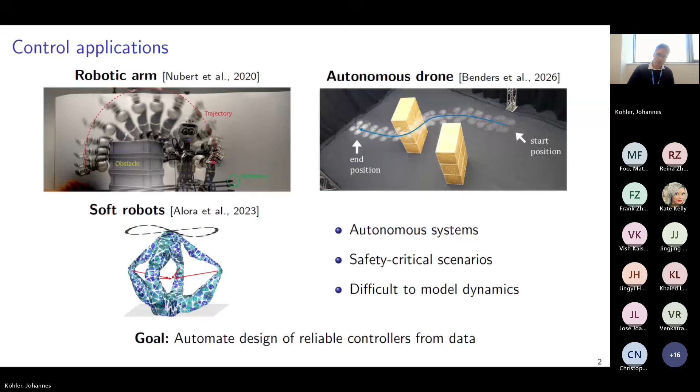Now, what makes these problems challenging? One thing I already mentioned is we want safety critical constraints. That's important. There's also a lot of things that are uncertain about a system's behavior. There's external noise we have to think about. And there's also the fact that typically we don't know how big these uncertainties are or what our actual system model is.

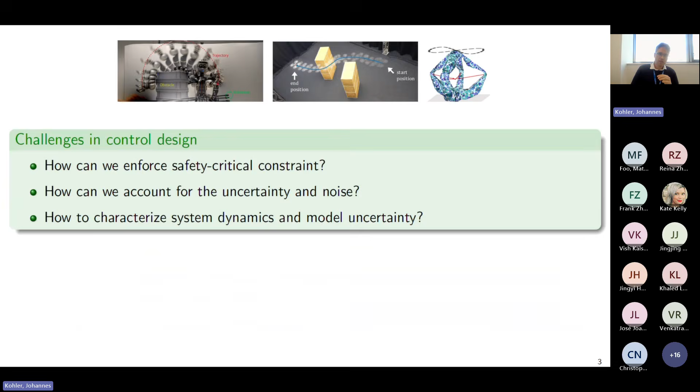The answer to these questions that I'll present in this talk is what I call data to predictive control, short D2PC. We'll have later some illustration that explains this better. But in essence, we want to use the experimental data we have to characterize both a model that explains the data and an uncertainty description. Then we want to use this description to design robust controllers and predictive controllers. And by combining these elements, we'll get a data-driven control design that will give us desirable performance and safety guarantees.

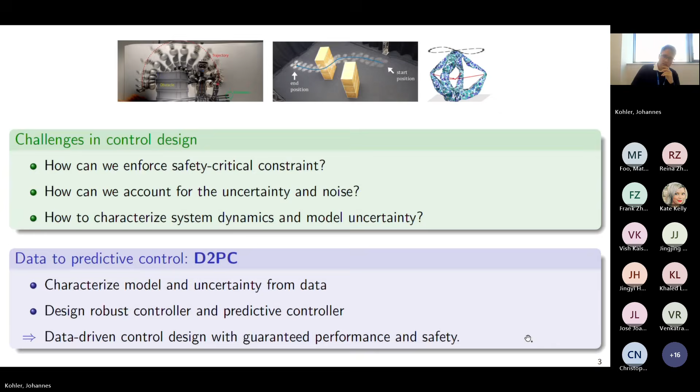Now, for the overall work, we can think about the following pipeline, and all of this presentation will be based on this pipeline. We start with a real system for which we do an experiment and we get input-output data out of it. Usually it's noisy. Then we have structural constraints. By this I mean prior knowledge we have about the physical system. Whatever we have, we want to be able to use it. That's also a very important property. Then we combine our structural knowledge with the data in an estimation step to get as much information from data as we can about our physical system.

In a second step, we want to do uncertainty quantification. So we want to get an understanding of how accurate the model is that we retrieve from data. Once we have our model and a description of the uncertainty, we want to do a robust control design where we want to be sure that we account for these model uncertainties. And in the last step, we want to also use predictive control with online optimization during runtime, which will additionally enforce safety critical constraints for the uncertain system.

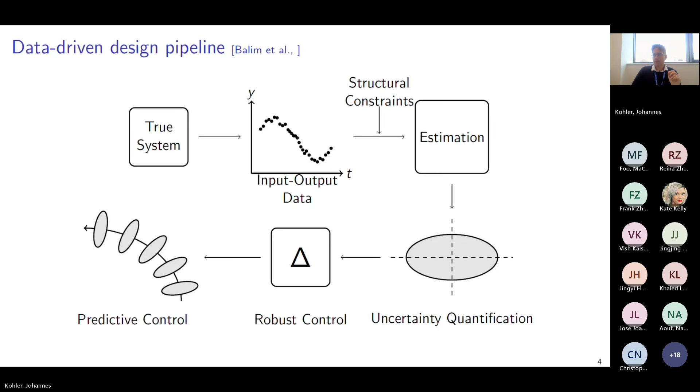So if we think about such a control design, it actually touches different research fields in control theory. The first one is the field of system identification. Classically in system identification, we think about how we can retrieve models from data. Sometimes we also think about uncertainty quantification there, so how accurate models are. But typically system identification does not deal with the separate control synthesis based on the model.

Another related field is the field of robust control. In robust control, we're typically given uncertain models, often with a block structure like this, and we're able to synthesize controllers that give us stability and performance guarantees for this uncertain system. But robust control typically cannot account for the constraints we have in physical systems, such as actuator limitations or obstacle avoidance.

Now, the third related research field is model predictive control. In model predictive control, we try to enforce constraint satisfaction, so actuator limitations and obstacle avoidance. But typically, most of model predictive control theory requires an accurate model for predictions and also assumes state measurements. So if we want to have such a data-driven design, we need tools from all three disciplines, and none of those three research fields actually answers all of the questions we need.

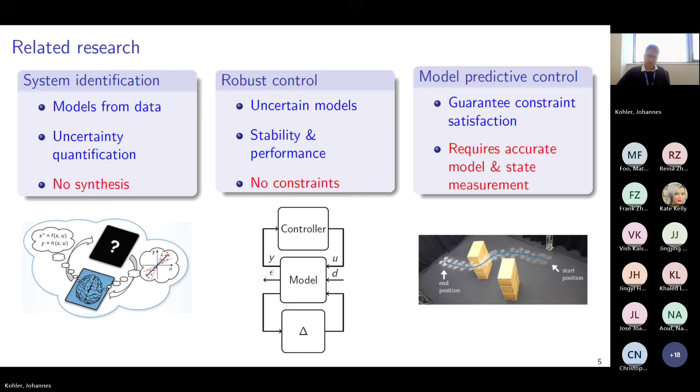So really what data to predictive control aims to do is to get the best out of those three fields and put them together. The key challenge here is that these different research fields in control have inconsistent modeling assumptions. What do I mean by that? In system identification, classically, we assume stochastic, often Gaussian, process and measurement noise, which is IID distributed. In robust control, we typically deal with uncertainties that are dynamic functions which live in some deterministic set that we know.

In model predictive control, we typically assume that we measure the state, and often we don't have any model mismatch, or a very simple description of it, for example, one that simply lives in a compact set like a polytope. So we have three very different descriptions of uncertainty, and it's hard to just combine those fields. One of the key technical contributions we've made to combine them is that we derived robust control and predictive control methods tailored to the uncertainty resulting from the system identification step.

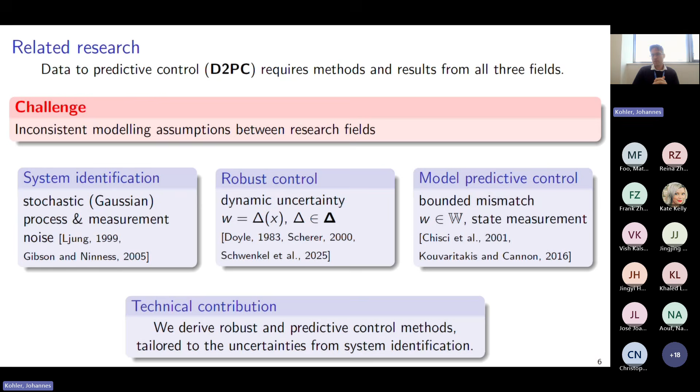Now, one thing I want to note: throughout this talk, I will mainly look at linear dynamical systems. This will make a lot of the exposition easier. Towards the end, I'll briefly touch upon what results we currently have for nonlinear systems and what is still challenging.

So we'll look at linear stochastic systems, where X is the state, U is the control input, W is the process noise, and X plus is the next state, in discrete time. Y is the measurements we receive, which are partial measurements of the state plus measurement noise. We assume the process and measurement noise are Gaussian distributed IID with covariance matrices Q and R. What's important is that the system matrices A and B and the noise covariance matrices Q and R are not known a priori. Instead, we have an input-output trajectory from a finite-length open-loop experiment.

So first we have to go from this data to estimates of these unknown quantities. Then, to get safety and reliability guarantees, we need to understand how big the epistemic and aleatoric uncertainty is. As a reminder, aleatoric uncertainty is the stochastic uncertainty in nature, so process noise and measurement noise. Epistemic uncertainty is the uncertainty due to limited knowledge, because we don't know the exact entries of the A and B matrices, for example. So we need to understand how big those two uncertainties are, and then we need robust and stochastic prediction methods that can account for this uncertainty.

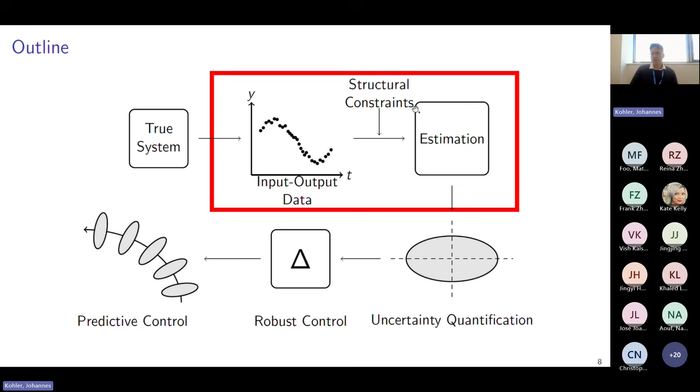So the outline of this whole talk will be based on this pipeline. And now that we've described the real system behavior, the first step will be understanding the estimation step, where we're given this noisy data, and we'll talk about structural knowledge that we can optionally incorporate if we have it, and the type of estimation procedure we do.

Now, the structural constraint we'll assume here is that the A and B matrices, which we don't know, are linearly parameterized by an unknown vector, which is finite dimensional. So what does it mean? If we don't know anything about a system, modulo maybe an upper bound on the order, then we can take a normal form, like an observer normal form, where we know certain entries will be 0 or 1, and all the other entries that we don't know will be given by this finite dimensional parameter.

On the other hand, if we have a physical system, like a mass spring damper system, and we just don't know the damping constant, then only this one entry, which we don't know, will be given by this uncertain parameter. And by just saying these matrices are affinely parameterized, we can model flexible combinations of these two. So whatever prior knowledge we have, we can incorporate.

In addition, for the covariance matrices, we assume they are also parameterized, not necessarily affinely, by some vector. This can, for example, be a diagonal or Cholesky decomposition. What's important: everything we don't know about a system can be captured by this finite dimensional parameter vector theta.

Now, what we do for estimation, in some sense, is very simple and classical. We do maximum likelihood estimation. That is, given the data we've observed, we look at the likelihood of a certain parameter, and we search for the parameter that's most likely given the data.

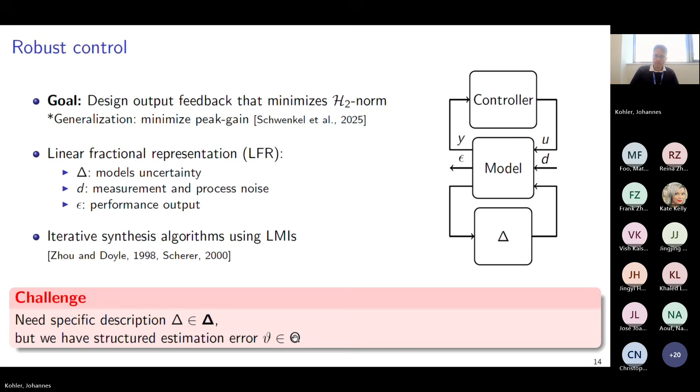The challenge we have is these existing methods require a very specific description of the uncertainty in this linear fractional representation and a very specific structure of this uncertainty block delta. Instead, what we have is an affinely parameterized model where this parameter is subject to a structured ellipsoidal constraint. Now, one of the key contributions here is we've shown an equivalent way to bridge these two descriptions.

Specifically, let's just focus on the A system matrix. We can write the uncertain A matrix, which depends on the parameters we don't know exactly, as our nominal estimate from data, plus a matrix delta, which is the error in the parameters with a Kronecker product and an identity. So this is a very structured matrix, multiplied by a matrix which captures how the parameters affinely enter the A matrix. So those matrices are all known, and it's only this delta matrix which is not known, which depends in a specific structure on our uncertain parameters.

Now, what we've shown is the fact that the parameters lie in a given ellipsoidal set is equivalent to the fact that this matrix with this Kronecker structure lies in the following uncertainty set. What's important about this description, if you've seen this before, we have here a matrix inequality on the matrix delta, and this is exactly the kind of description we need to apply existing robust control tools.

Here we also have so-called multipliers, and these multipliers capture the exact shape of our uncertainty, where we have here again this Kronecker type structure, and this matrix sigma captures the exact shape of the Hessian of the negative log likelihood, which we used for uncertainty quantification.

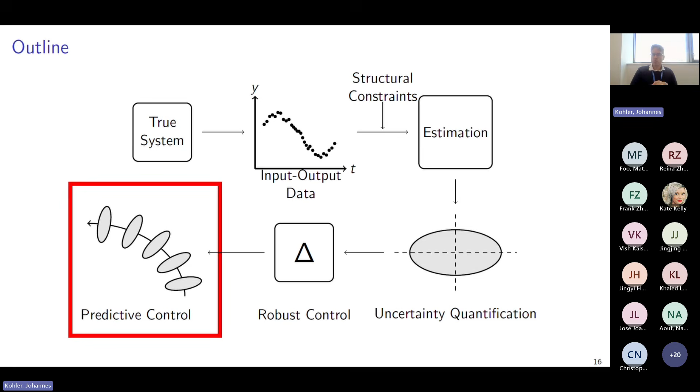Okay, so with this, we already achieved a lot. We now have a controller that stabilizes the system, guarantees some performance, but now we also want predictive control to deal with these higher level objectives, such as constraints.

So here specifically, we want to have a predictive controller that, in addition, satisfies probabilistic constraints of this form. So why do we look at probabilistic constraints? We have stochastic noise, so ensuring deterministic constraints would not be feasible. These are half-space constraints, so this is the simplest form of constraints we can have. We can similarly look at input constraints, but I'll keep it simple here. And we want that these constraints at any point in time are satisfied with a certain probability P, which the user chooses.

And we want to be sure that these probabilistic constraints hold for the closed loop system, even though we don't know the exact model parameters, and we have unbounded stochastic process and measurement noise, and we only have access to output measurements. The key challenge is that the prediction of the future state depends on this unknown deterministic parameter and on this unbounded stochastic noise.

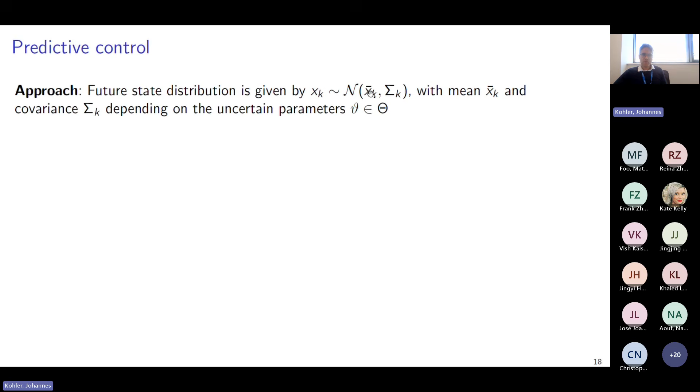How do we deal with this? If we would know the model exactly, then we would see that the future state also follows a Gaussian distribution where both the mean and the covariance depend on the uncertain model parameter. Now what we do is we treat both of them independently. Offline, independent of the actions of the controller, we can do a stochastic propagation where we compute a covariance matrix, which is a robust upper bound to the future covariance matrix, which we do not know. This can be done with a semi-definite program and is very similar to classical robust control tools.

What's important, I'm talking here always about Gaussian distributions, but most of the things I'll present in the following equally work for so-called sub-Gaussian distributions, which is a more general class of noise distributions, which doesn't just include Gaussian distributions, but also, for example, uniform distributions and any zero mean bounded distribution.

First, we need to choose a parameterization of these sets. Here we pick ellipsoidal sets that are centered around some nominal prediction and that are scaled by some scaling alpha. And now we just have to determine how much we have to scale these ellipsoidal sets to make sure all the uncertain trajectories lie within it. The way we determine the scaling is this simple scalar error propagation. This says the scaling at the next time step is first exponentially contracting.

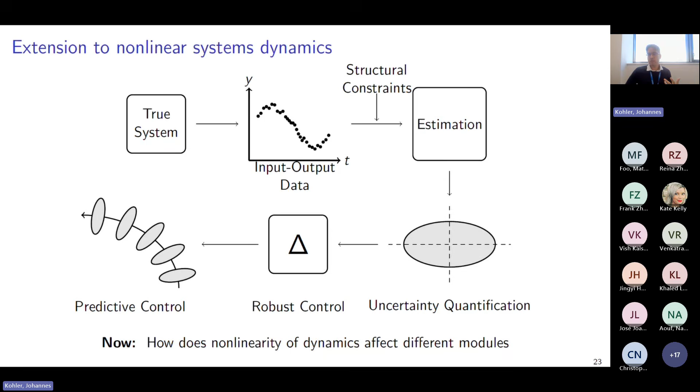Okay. This is the main part I wanted to cover. I want to just quickly give you a flavor of what changes if we go to nonlinear systems. And this means if we do the same pipeline, but for nonlinear systems, why does it get hard and what can we still do? And here the key challenge, in my opinion, is the data-driven estimation.

And the problem is what we used so far is that the maximum likelihood estimation or the state distribution has a closed form solution like a Gaussian distribution. And this breaks in a nonlinear setting. What we can do instead, we can use moving horizon estimation to provide a finite horizon recursive approximation of the maximum likelihood estimation for a given model.

Now, how can this help us? The way we can identify models from data instead is we can identify parameterized models using the so-called classical prediction error method, where we just train a predictor from data to be as good as possible. And the trick here is that we can use moving horizon estimation as a general state estimator for general nonlinear dynamics.

In addition, for uncertainty estimation, we can also use moving horizon estimation to estimate the magnitude of the process noise and measurement noise from data, which can then be used to determine the maximum noise we need to account for in the robust design.

For the robust and predictive control, the first thing I have to note is that model predictive control on its own is very well suitable for nonlinear systems. There are strong theoretical results, there are good numerical solvers for nonlinear systems. What is harder is the robust or stochastic design for nonlinear systems, because there's no exact formula for uncertainty propagation.

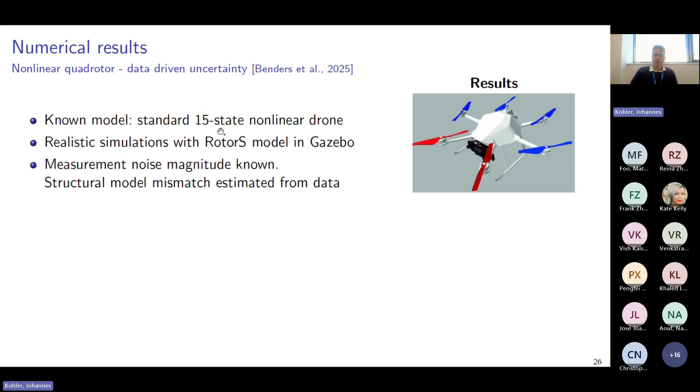And on the other hand, we take a known model as our model, a standard 15-state nonlinear drone model. We'll assume we have a rough idea of the magnitude of the noise, but there will be a structural mismatch between those two models. And we want to estimate it from data such that we can automatically design a robust controller.

Now what we do is run this moving horizon estimation offline over a large period of data, which requires about 1 hour for these experiments. Then we use this understanding of how big the noise is to design a robust controller, which takes about 5 minutes. We take another calibration flight, and with this we get a reasonable error quantification.

And what's important, this is similarly a modular open source pipeline. By executing it, doing 2 flights, we have a reliable controller after 2 hours. And of course, 2 hours is a lot longer than the few seconds we said before. But if you work with real robotics problems, having something that runs after 2 hours is really good, in my opinion.

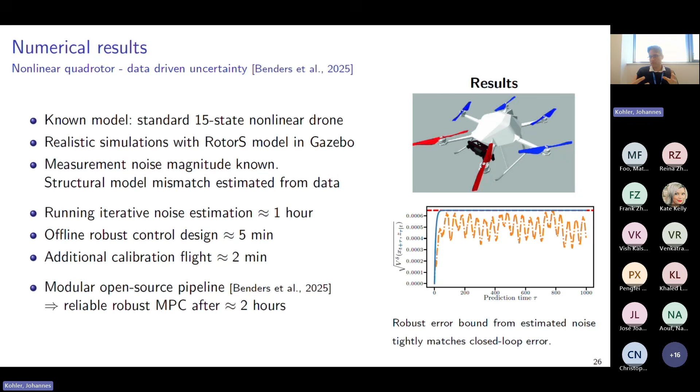Yeah, this already brings me to the conclusion of this talk. I've presented an automatic design pipeline where we go from data to estimation, uncertainty quantification, robust control, and predictive control. What's really important is this pipeline is modular. It applies to stochastic input-output data. And the key novelty to realize it is that we develop robust and predictive control methods that are tailored to the uncertainty characterization we get from data.

What I presented today is largely based on this paper, which was led by Haldun Balim, who was a previous student of mine. In my opinion, the methodology is quite mature now. So for certain classes of problems, linear, not huge dimensions, I think you can really apply this out of the box.

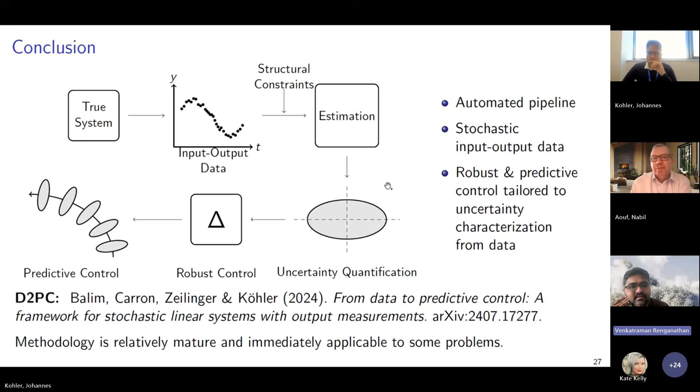Yeah. So essentially, you have like an upper bound on the covariance, right? Because what I see here is that once you have the controller from the robust control design, and what you want to do is just actually handle the uncertainties, you can pretty much do something like a simple covariance steering, right? Because when you do a covariance steering, you will have a similar terminal covariance constraint.

You can handle both state and input constraints in a probabilistic sense, meaning that you can do chance constraints for the satisfaction of both state and input constraints in the probabilistic sense. And if you go to slide 20, this will allow you to actually also do some sort of a risk allocation across time steps, because you are actually enforcing the same risk across all time steps.

Because I see some sort of a tension between satisfaction of the chance constraint and the satisfaction of the performance, the H2 norm bound. So I feel like you can reduce the conservatism a little bit.

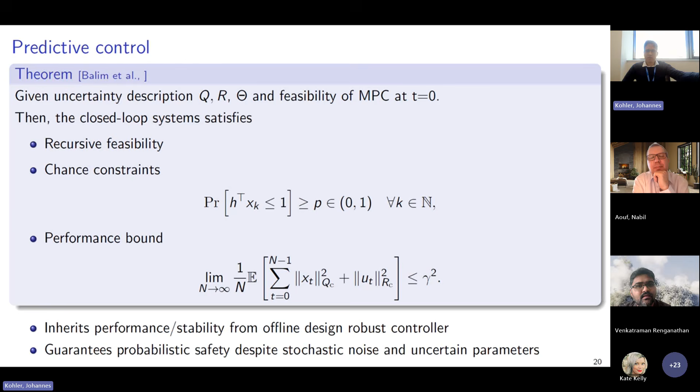But maybe what's important if we contrast to, let's say, covariance steering. Here the policy is largely already fixed. We have a structured dynamic output feedback controller computed offline. We only online optimize an input sequence. But the challenge is that we don't know the model. Most covariance steering problems I know have a known A and B matrix. And the reason we compute an upper bound and not just know the covariance is because the A matrix and the B matrix have a very structured uncertainty that we don't know exactly.

Okay. This is your second question, Venkataraman? Yeah, and just one more question. You said your estimator is asymptotically Gaussian in one of the first slides, right? Yeah, here, especially. Can you use some newer methodologies like conformal prediction with finite data to come up with that set capital Theta? Because all you have is just the finite time input-output data, right? Can you construct a confidence set using conformal prediction?

Good question. So yeah, relaxing the asymptotic aspect here would be nice. There are a lot of classical finite data results in SysID. If I measure the state, that would make it easy, but I look at problems where I don't measure the state. Conformal predictions would have a very different interpretation of the probabilistic validity. I think that's important to keep in mind. And I would still say it would not be straightforward to apply conformal predictions here to get this error bound. Yeah. Thanks. Okay, thank you.

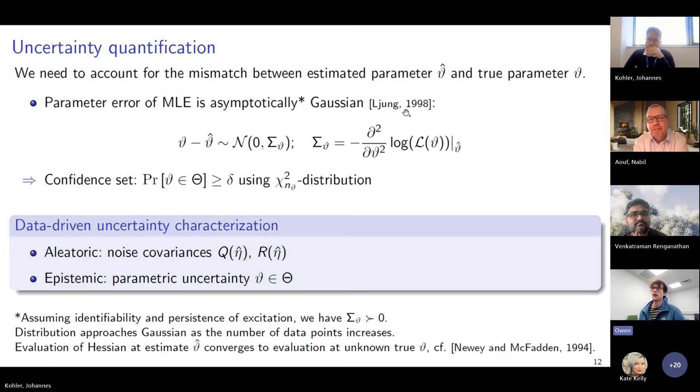Hi. This is not really my area, so I just had a high level question following on about contraction theory and conformal prediction. Would you be able to give a high level comparison between the advantages and disadvantages of your method compared to something like a conformally contracting controller? Because my understanding is that you can also get bounds on the sets for your controller in that case.

Can you be clear? You said conformal predictions, you said contraction metrics. Which one do you mean? So there's some recent work on conformally contracting controllers, a paper by Hiro Tsukamoto that I came across recently, where they combine conformal prediction and a contraction metric to come up with a controller.

Okay, I think on a high level, a lot of what this talk was about is understanding model and uncertainty from data. And once I have it, for linear systems, I know how to design a good controller. For nonlinear systems, that is contraction metrics. I kind of know how to do it, but it's sometimes a bit harder. And I hope I'm thinking of the right paper, but what you can do is, with state measurement and nonlinear dynamics, directly verify such contraction properties from data with conformal predictions. Because the nonlinear synthesis step is computationally challenging, you go to sampling.

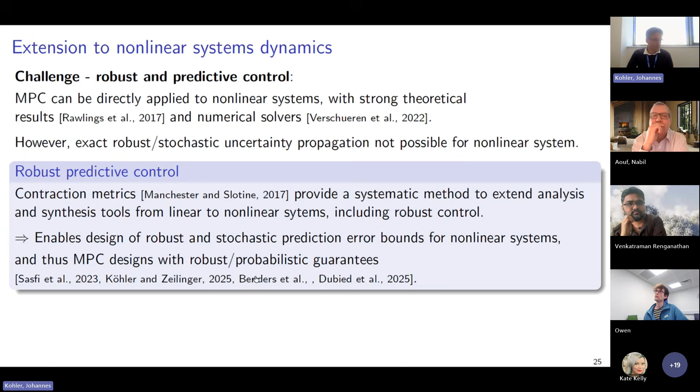So is it also that in this case it's quite a powerful thing that you don't assume you have any state measurements as well? Yes. So I would really say if I would have state measurements, a lot of the things would get trivial. Like for example, system identification of a linear system with state measurement is least squares. And for finite data bounds, there are a lot of papers that give you very good finite data bounds. Even for nonlinear systems with state measurements, I get very strong finite data bounds.

It's really, in my opinion, once you go to experiments, you don't have state measurements. Even if you have, at best you have noisy state measurements, usually not even that. And I think there's a big gap between some of the theory that exists that needs state measurements for data-driven, while in reality data is usually only output measurements. And this is where really it's hard.

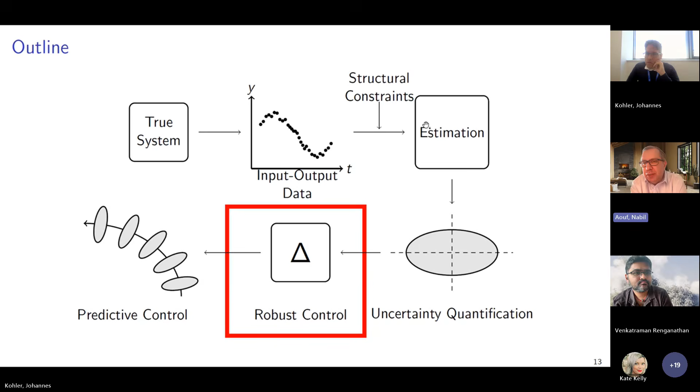Can you maybe elaborate more about how to compute the factor rho for the tube scaling example on slide 18? That's a question for you, Johannes. So in general, I would say robust MPC, one way to do robust MPC are these tube scalings with a contraction factor rho. There's a way to automate it. It's called the peak gain. So you want to have the smallest possible tube. You optimize over this rho essentially with a bisection to get the smallest tube.

So it doesn't have an analytical formula. It's scalar. You do a bisection. You try to get the one which gives you the smallest tube. And in classic robust control, a lot of the literature is called reachability analysis and peak-to-peak gain. Okay, so that's actually the answer.

Regarding your MPC structure on slide 20, is it possible that you have a learning-based MPC where you have an estimate? In learning-based MPC, you have a nominal model, which you can combine with whatever you get in the robust control, and then you estimate the uncertainties from the data, let's say using least squares, and you have a learned model. You use the learned model for the cost function and the nominal model for the constraint tightening, something like a learning-based MPC instead of just a robust MPC here.

Because I don't know that your main purpose of using robust control is just to have an H2 bound, right? Instead, you can actually bring those constraints into the MPC and then have the formulation of the MPC as a learning-based MPC.

Conceptually, I can do a lot of learning-based MPC also here. Practically, the system identification is a lot harder here because we don't have state measurements. So a lot of the strong online learning and adaptation methods for models are also hard. If I had state measurements, I would have a lot of methods. I would directly use them, also for nonlinear systems, to online adapt the model and use these adapted models. It's in the output feedback setting that it gets tricky. And you'd first have to think about how you quickly re-identify and learn your models online in the input-output setting.